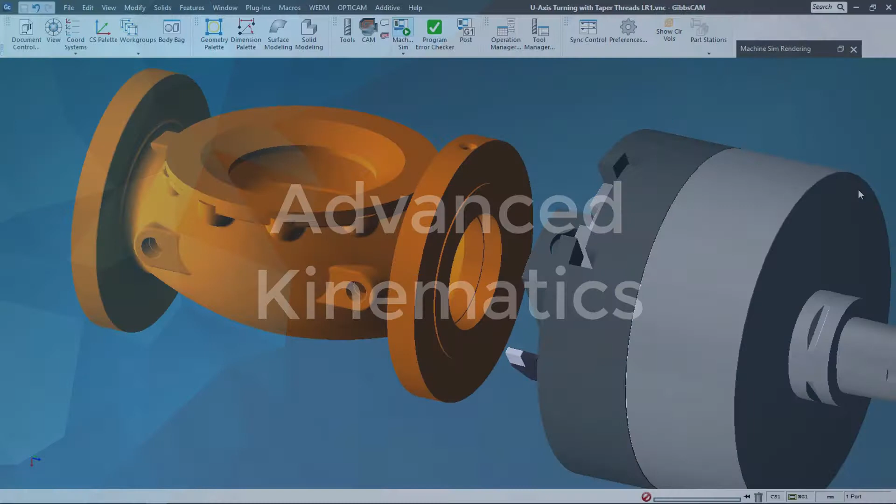GibbsCAM 14 continues to build on that universal kinematic machine engine that we introduced a few years back. One of the things that we're able to do now is U-axis turning like you see here. Let me pull up a video really quick and show you an example of U-axis turning on a Trevisan machine.

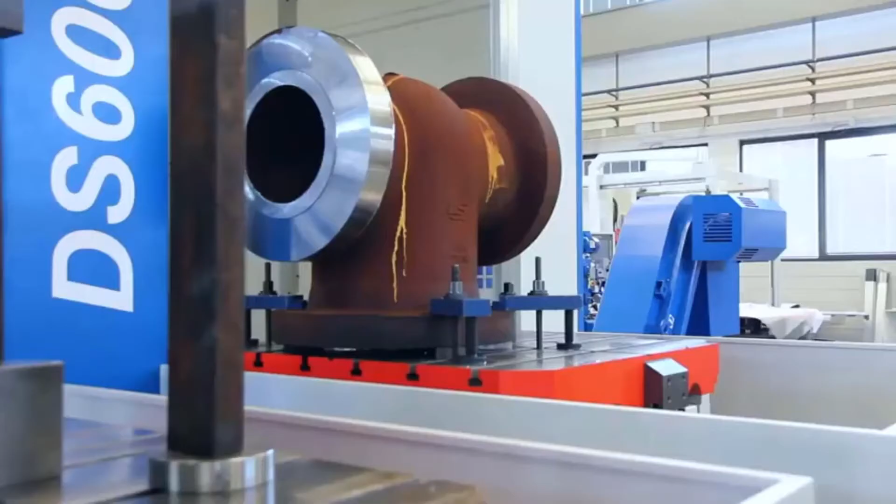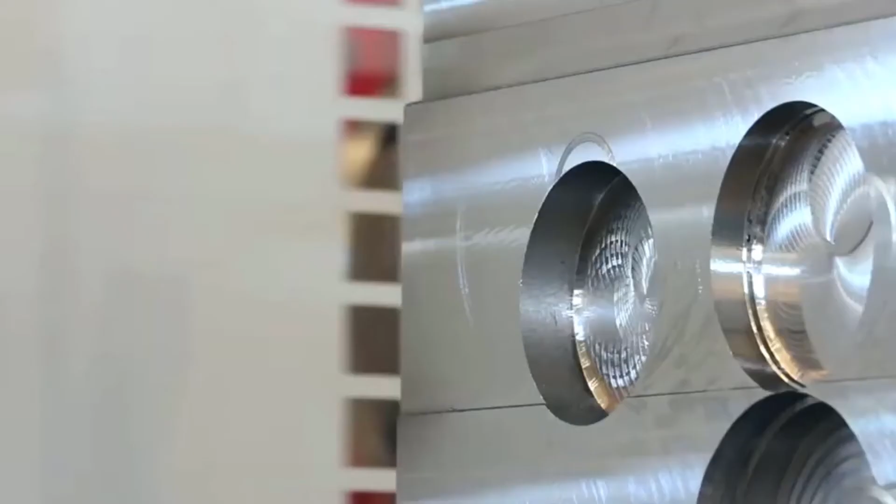You can see in this application the part is too big and probably too unwieldy to put on a lathe, so this U-axis machining is a really great solution for this. And this is really big if you're in the valve business, or if really you just need to turn something that's either too big or too strange to fit on the lathe. And you can see here the adjustment in that axis.

So let's get back into GibbsCAM. I wanted to quickly show how easy it is to program this U-axis. If we double click on the tool, we can see setup's really easy.

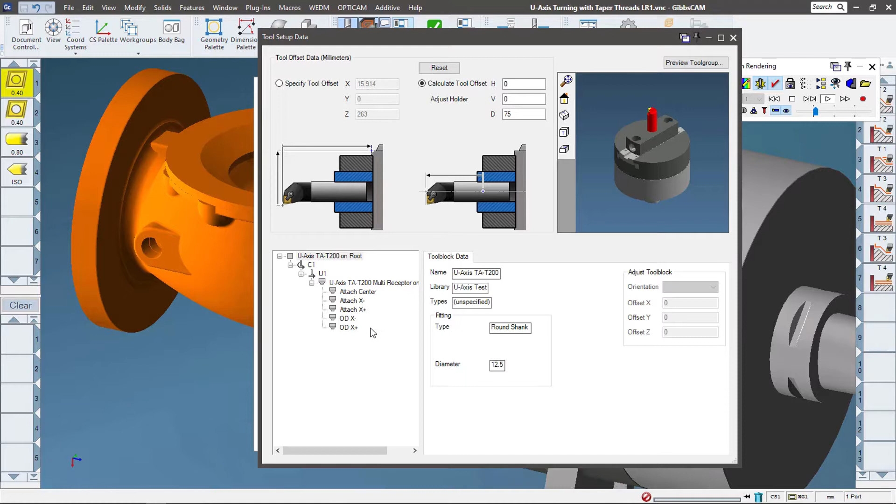We open up our intermediate tooling page and we can see that here's the tool listed, and we also have these attachment points. This tool that we see on the right has 5 different attachment points for the cutter. We can pick each one of those depending on the type of tool or the type of machining that we're going to be doing. Let's go ahead and move on really quick to machines with swappable heads.

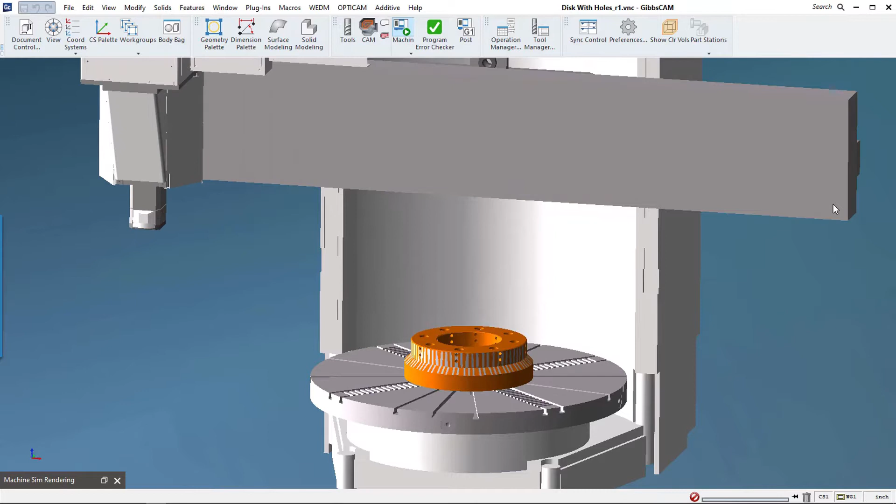GibbsCAM 14 now supports machines that have several heads on them, and now a swappable head may be something like you see here, going from maybe a right angle head to a straight head or vice versa. It's a head that may change the axes of machining for your part and for that operation.

So this is a pretty straightforward example. We've got a right angle head coming in and doing some machining, right after that straight head came in and did it. I want to show you another example that I feel is just really interesting. This machine is a Waldrich Coburg Taurus machine. This actually has these big swappable heads.

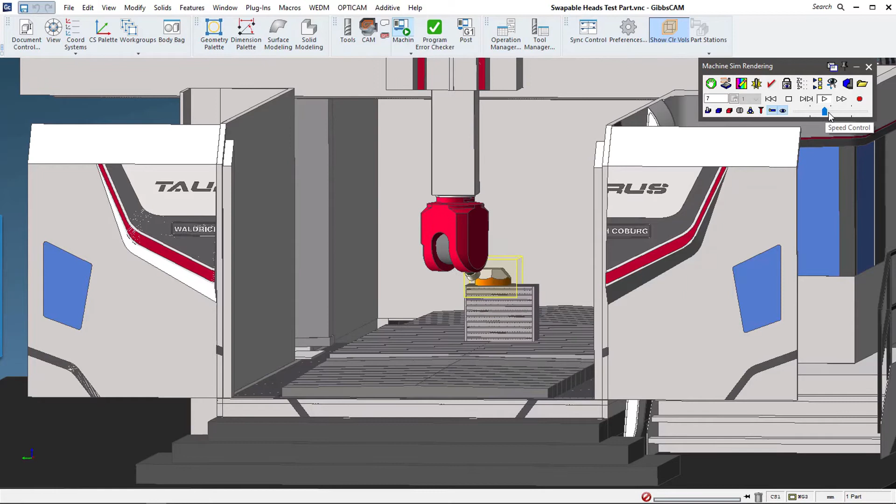You can see here it's going with a 5-axis head to do those fillets on the side. I'm going to speed this up a little bit so we can get to the other stuff. So here's where it's going to go ahead and swap out for that next head.

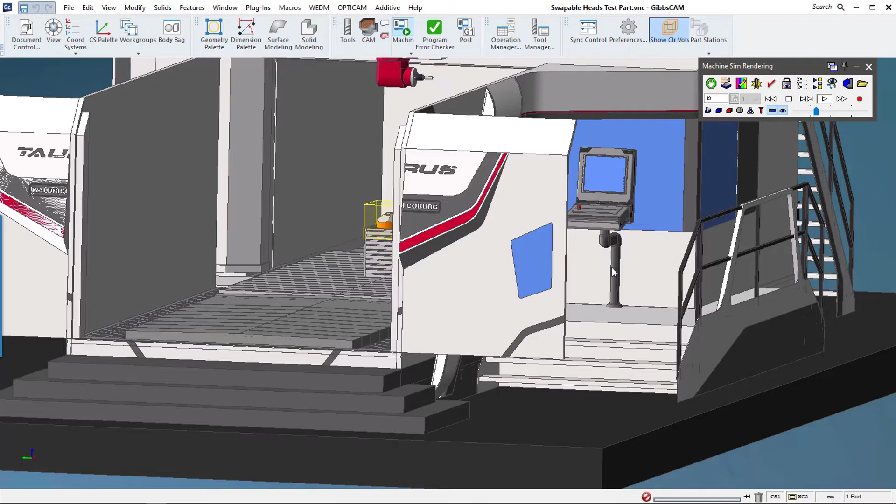You can see there's some really interesting tool motion there, but this is one of those machines that you actually can walk into, the ones at the tool shows that are just enormous. Some of them have cars on the beds, but this is an example of a really good advanced piece of machinery that is now programmable inside of GibbsCAM really easily using that swappable heads capability.

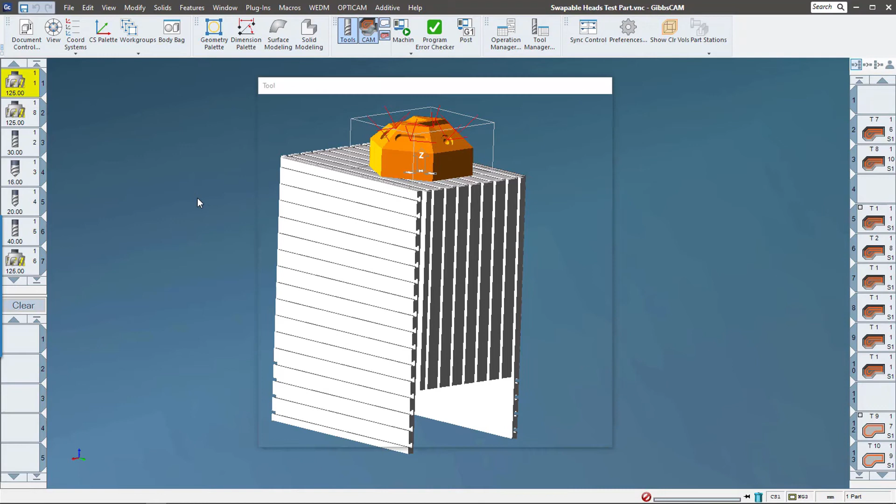And again, to choose those heads, really easy to do, just like you'd expect in GibbsCAM. Just double click on the tool, come over to my intermediate tooling, and now you can see here are the 3 different heads that I have available in this new graphic display in GibbsCAM 14.